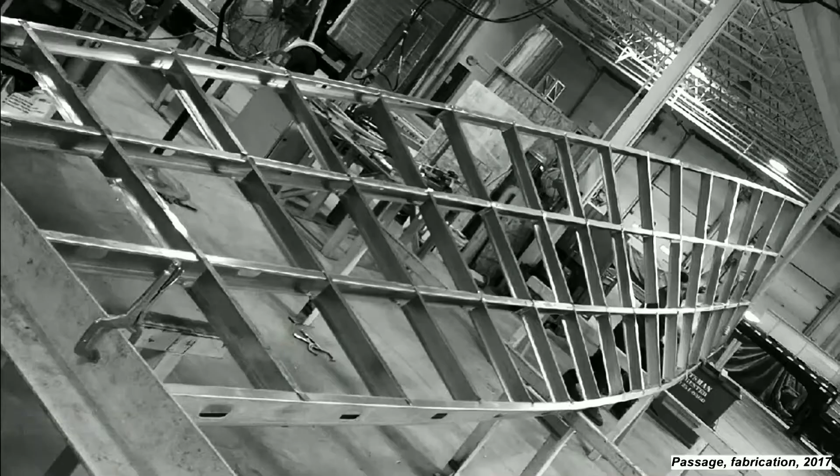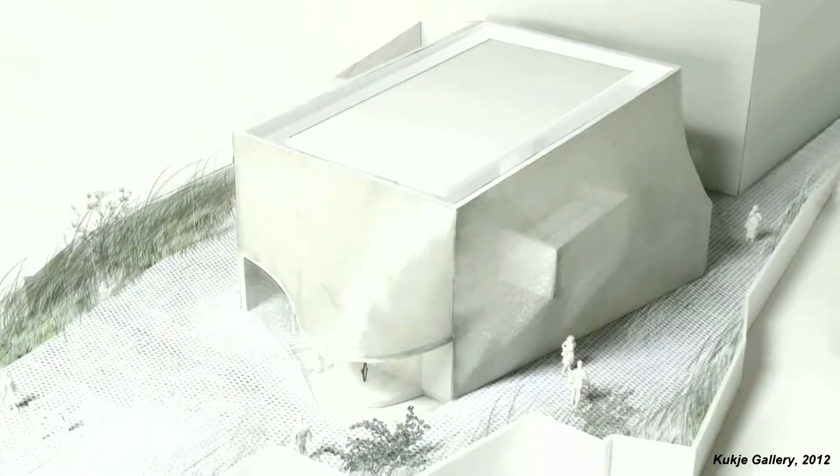So where we started with maybe a more traditional idea of building a practice around an artistic idea that then turns into a model—maybe a computer model, a mock-up—suddenly you have to go on Alibaba to the other side of the world and weld together 500,000 rings in a little courtyard in a place six hours' drive from Beijing in order to produce this.

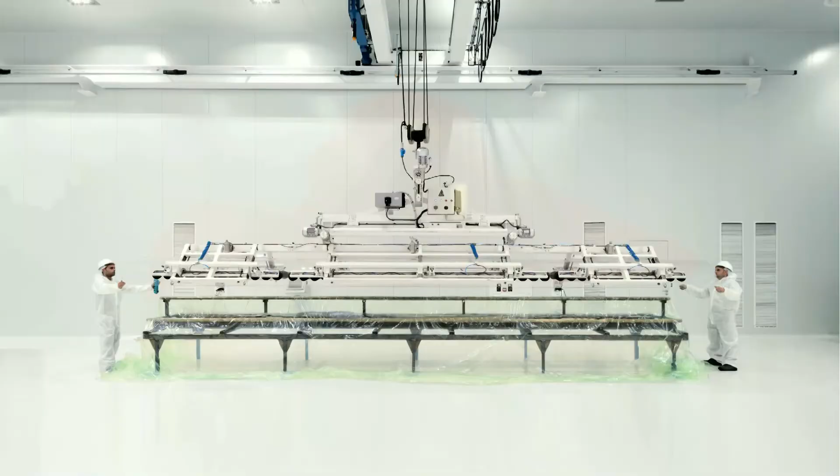Or when you're fascinated by an image of fragmentation and diffusion, you build a model, and then you end up in Germany in a very large factory where a fully robotic plant builds these large 30-foot tubes that then get installed on the top of a building in Hong Kong.

So what I want to talk about today is not so much the idea of a single narrative—not the single line that is authored and controlled—but everything that comes and everything that is attached to the conception of a project at the moment you embrace reality. I'll show four projects in detail, and try to show how the process itself is, maybe, the author of the work.

They're all four recent projects, and the first one is maybe the most complex, and also the first time for us operating at a scale we hadn't operated at before—a master plan. A master plan we're working on, though it's not really a master plan, because we don't believe in masters and we don't believe in plans. So it's more a strategy, something that will last maybe 20, 30, if not 40 years.

And it is at the Niagara Falls, in upstate New York. The concept of time and the concept of how to embrace these long processes is one of the things that really affects the thinking of this project.

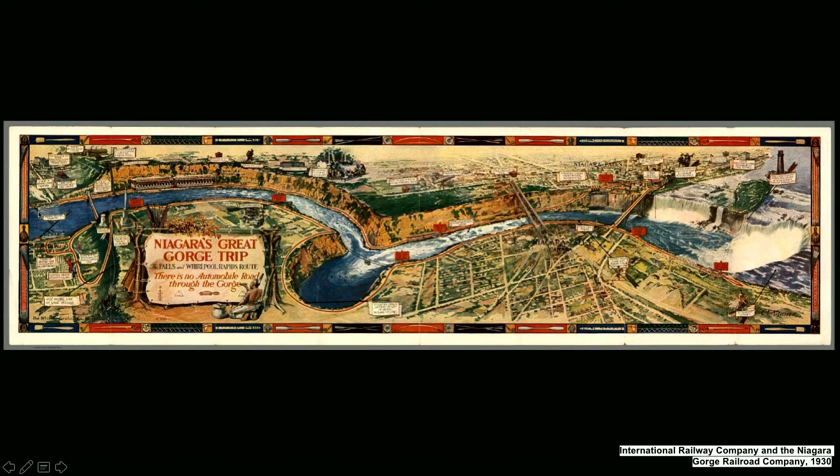And so if we go all the way to the left here, you see a site, and this is the site where this project resides, which is Artpark, and I'll get to that in a bit, for which we are currently working on a longer-term strategy. But if you go into the past and start digging how that place became what it is now, you realize an incredible amount of complexity.

I think it's important to see that the Niagara Falls used to be here, and gradually, over tens of thousands of years, it has been eroding backward upstream. This is at the edge of this slope, this is the site we're talking about. Also, there used to be here an Indian village, as it was described in the 30s, and we'll get to that in a bit.

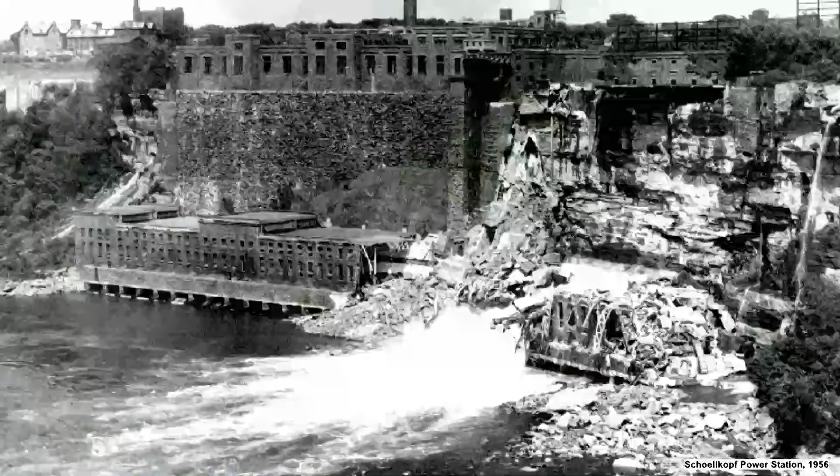What is also really important is that the entire economy of New York State is predicated on the hydropower that comes from the Niagara Gorge. And so the more recent history of our site starts when, in 1956, one of the main power stations collapsed.

The US was coming out of the war. Suburbia needed to be funded and goods needed to be produced. The upper Western New York region was a powerhouse of industry. As soon as this collapsed, basically there was no power anymore, and industry started to move. Nelson Rockefeller was at that moment the governor.

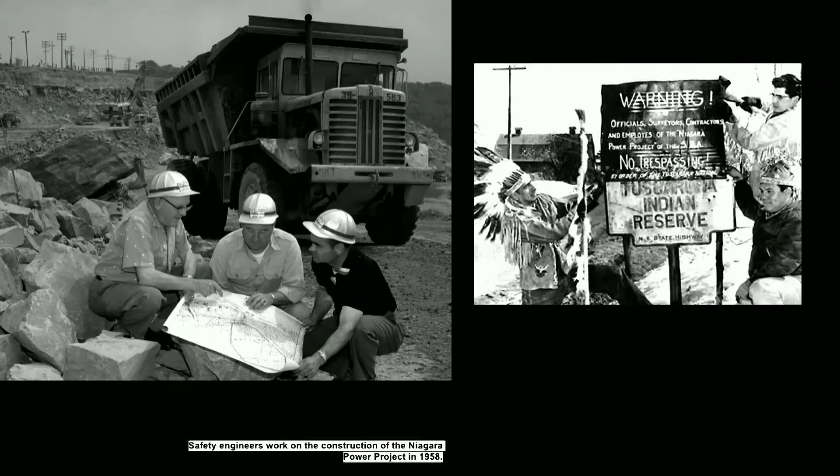But in order to do that, they had to remove two settlements of First Nations, the Tuscarora Nation and another nation. Their land was actually the land you see behind here. They fought it, they brought it to the Supreme Court, because obviously the First Nation settlers had been living in this area for the longest time. And here you see the Tuscarora Nation.

They went to the Supreme Court. The Supreme Court did say ultimately that the power of New York State is more important than the right to the land that these populations had had for many, many years. And so as they were digging, and this is post-war, there was a lot of earth movement happening. Here you see the lake, and here you see our site at the end of that gorge.

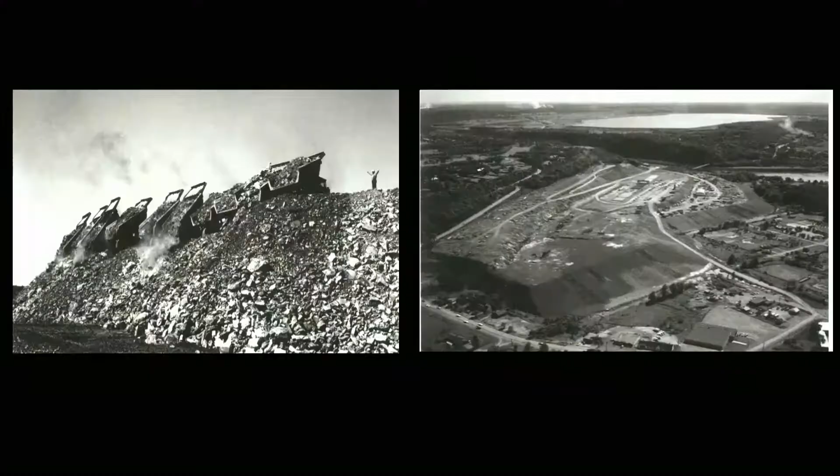Also in that time during the war, the Manhattan Project had happened up there, and there was a uranium backfill. And since there was so much earth movement, and almost like waste management of this whole area, that's actually what gave shape to this hill, which turned into Artpark. Here you see the lake, here you see the landfill where it was dumped in a town called Lewiston, with the truck path.

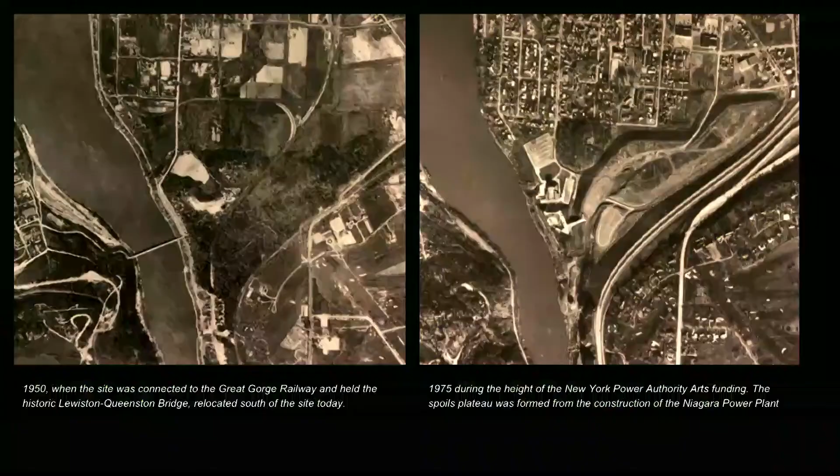They also encountered a mound from the Hopewell Nation. They avoided backfilling the land there. But here you see the aerial picture from before the fill and the backfill of the land, and the mound, the burial mound from the Hopewell Nation.

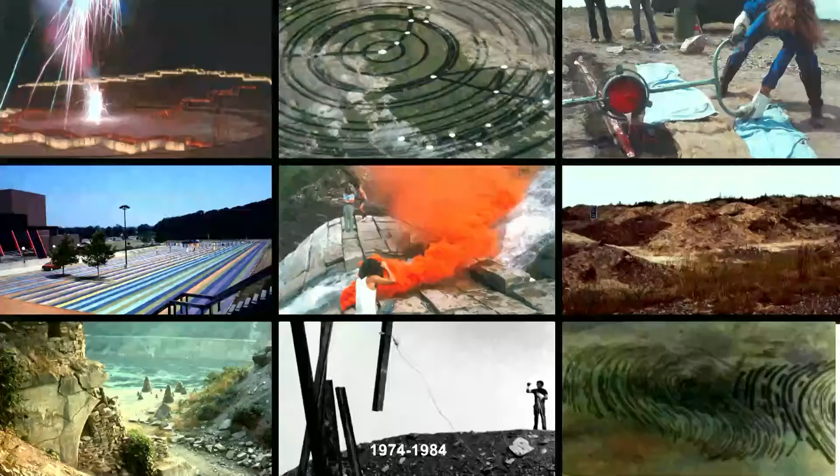Rockefeller thought, and this is a little bit later, but it was the emergence of land art, and artists were invited to use this backfill of this excavation to experiment. Not every artist in New York City was able to go west and dig craters or drive motorcycles, so many of the artists had to move upstate New York.

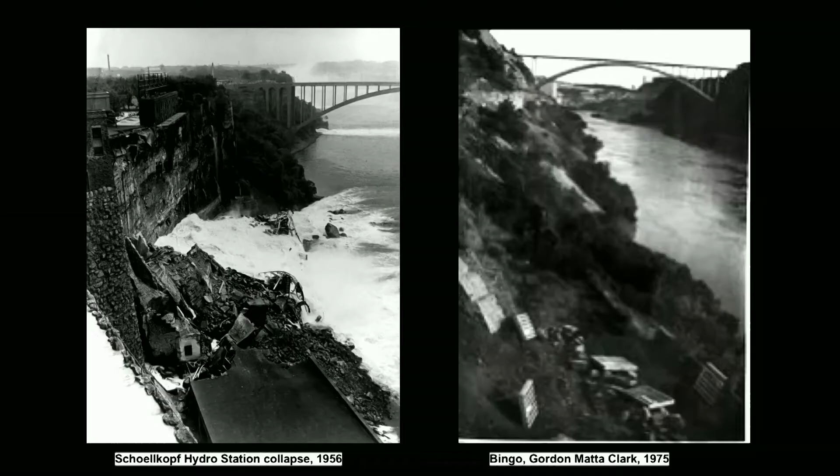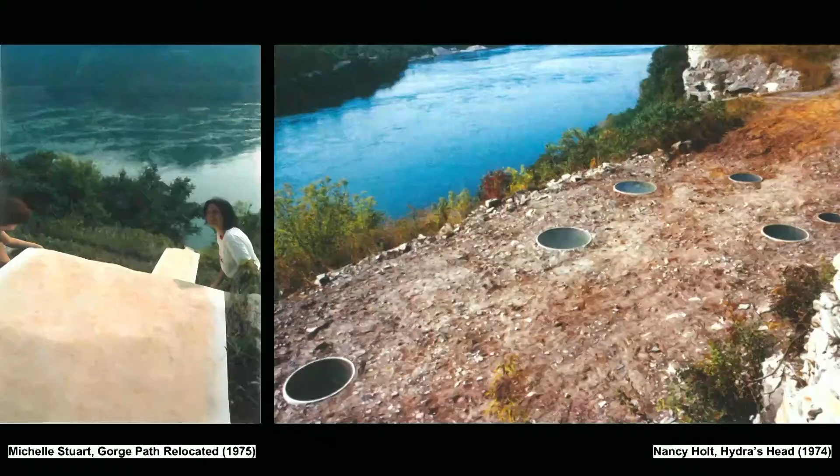This is really considered one of the main birthplaces of the land art and environmental art movement. For instance, Matta Clark reenacted the collapse of the station in a performance piece at the edge of the slope. The embrace of this depth, the topography and the soil, and the history that is buried within that land was an inspiration.

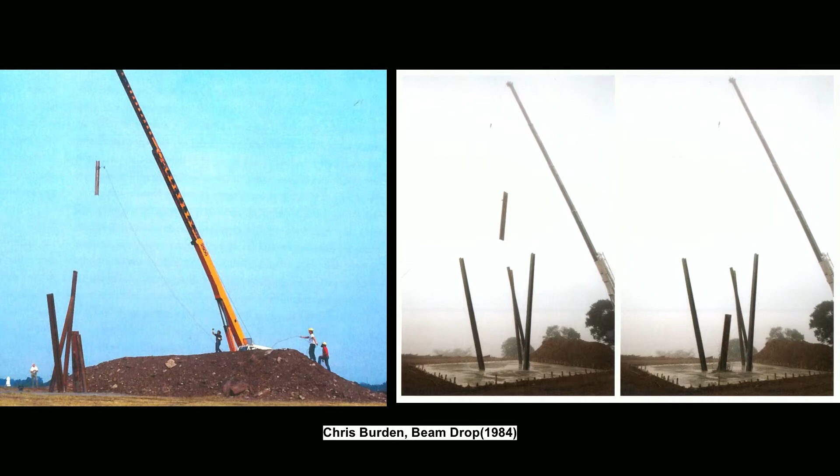Nancy Holt, Robert Smithson's partner, made beautiful cylinders that go into the ground, and from a more architectural point of view, Ant Farm dug a time capsule here in this soil. And maybe the most aggressive and macho, Chris Burden's beam drop, where he dug a hole, filled it with concrete, and with a big crane dropped these beams in.

So this idea of engagement with the earth and the soil, which all started with that backfill, began at that moment in history. Over time it became more popular, and there was funding. A local politician liked opera, so he built a theater for 2,500 people, although there were only 500 people living in the village.

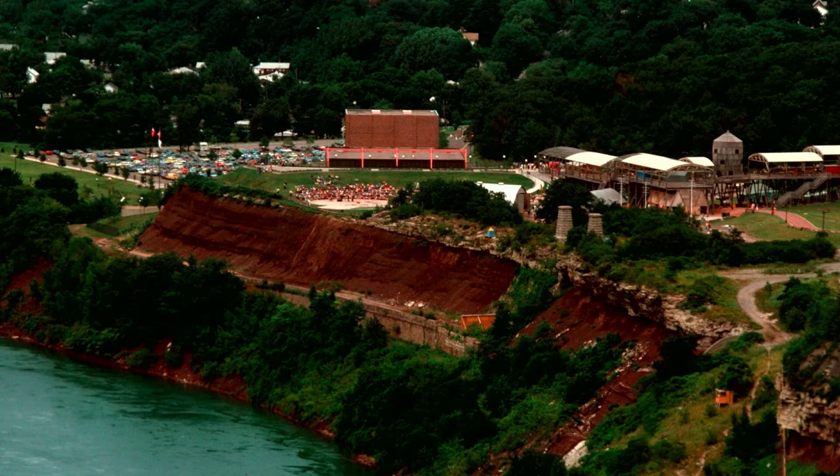There was participatory art, and in 1985 it was a really famous, great draw within the region. You see here the topography and the land. Gradually, when Rockefeller lost his power, the funding dried up, and the whole area, although still very much a park, is pretty much abandoned at this moment.

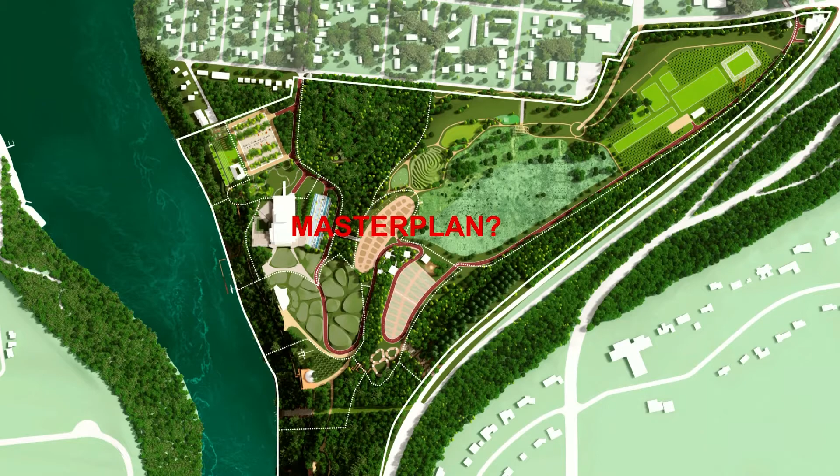So we were asked, through an interview and a competition, together with West 8, a landscape designer, and Charcoal Blue, a theater designer, to figure out what to do with this site. How, in a way, can we rethink this? With all this history, how would we address making a plan?

Indeed, there is no tabula rasa, there is no empty land, there is so much embedded within it. The site is very beautiful, the views are very beautiful, there is an intimate aspect of the gorge where you can get very close to the water, and at higher plateaus at some point you can see Canada, but it is quite empty and quite desolate.

The only thing that remained for the art was 12 classic rock concerts that happen annually, and that's also their only source of income. So the question was, how do you bring back a larger program, a larger audience, and also really make the site part of the experience again?

We started to visit the concerts. We saw Sammy Hagar and Jason Bonham, the son of John Bonham. We went to listen to all the old-timers, and in some way, the director said it very simply: our audience is dying, our acts are dying, what should we do?

But apart from just listening to the people who had occupied or claimed or taken over this land in the last 20 years, we also walked the site with representatives of the various First Nations. Interestingly enough, from their perspective, the best thing to do was to do nothing, to not touch the land, to not start moving earth or digging and transforming this place again, but to just let it rest.

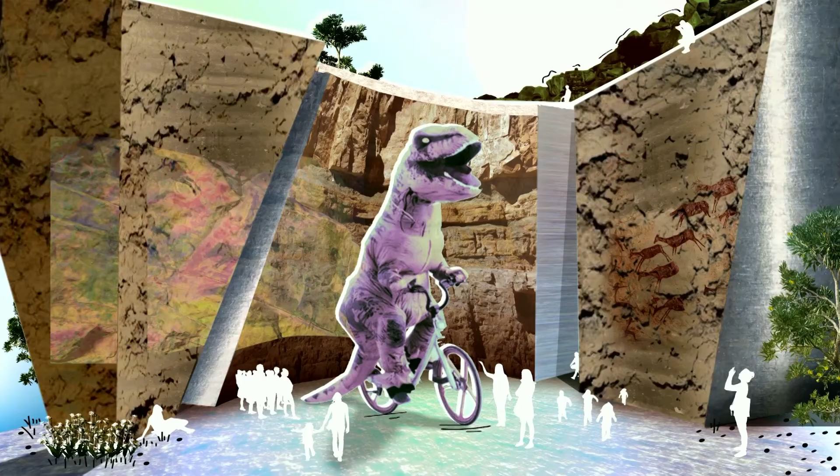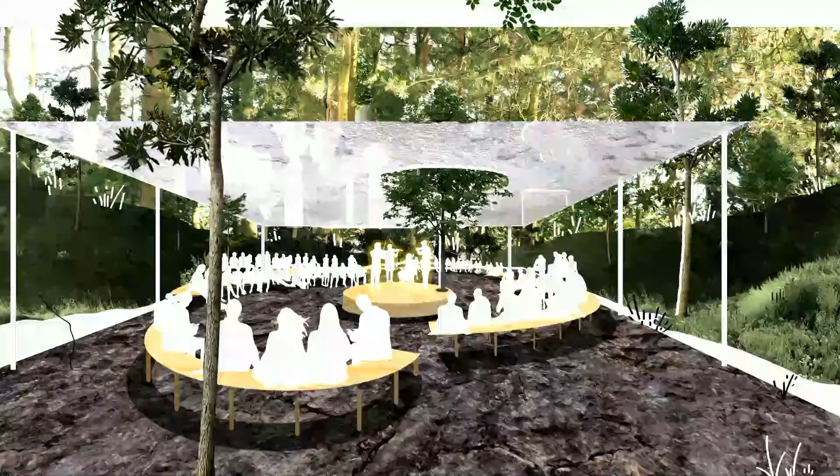So we felt we could not come up with a master plan that would radically add another layer to this. Instead we thought, is there a way to make this complex, layered history, these different sediments of time, tangible for an audience? Is there a way to deal with this idea of the section, to take people through these layers into the soil, if you want, to frame nature? These are a number of vignettes, and I should say maybe you saw an image of a big book we made.

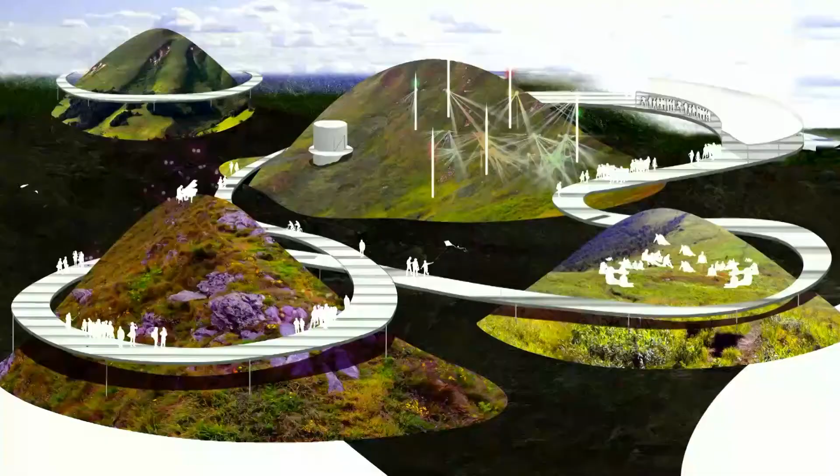But this is not a master plan, but it's really a series of interventions, a strategy of things that could be done in order to heighten an awareness with the audience of what is that layered and complex history that has taken place here, and also this embrace, in a way, of the artificiality of the land.

This is not beautiful nature. This is not a romantic landscape. It's not a park to escape from context. But in some way, it is representative of man acting on Earth.

It's owned by the power authority, which remained the responsible party for this land. And there is a real drive towards working to a more sustainable approach, bringing hydro, solar, and other types of power in there. So this idea of something a little more future forward is also something we wanted to introduce through this imagery and these vignettes that were guiding principles for a series of interventions.

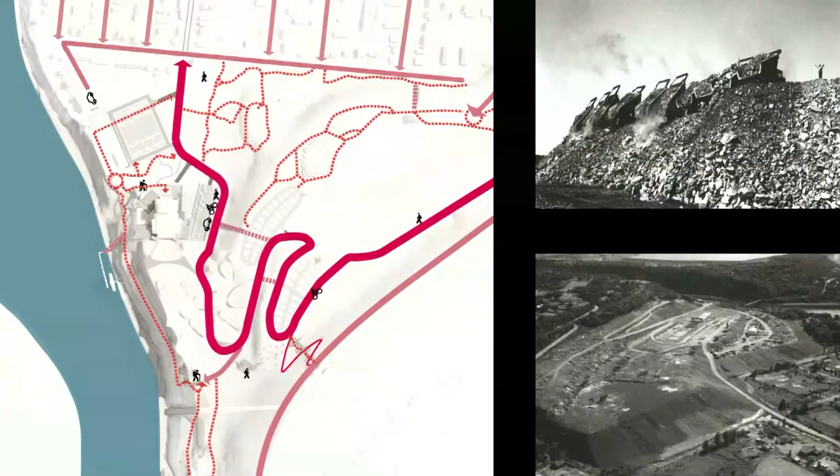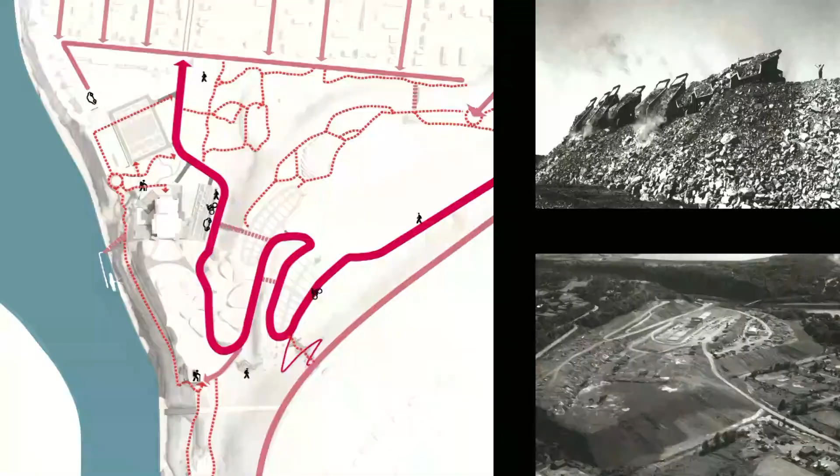I will not show all the interventions, and I will not show too much of the process, but I wanted to highlight one project that is now moving forward, which in some way tries to illustrate how we are trying to bring back the legacy of this land, the history of this land, and also bring it forward with a new proposition.

One thing is that we use the truck route as an organizing path on the site itself, so that as you move through the site, you're actually following the truck route that the trucks used to get down the gorge dumping soil.

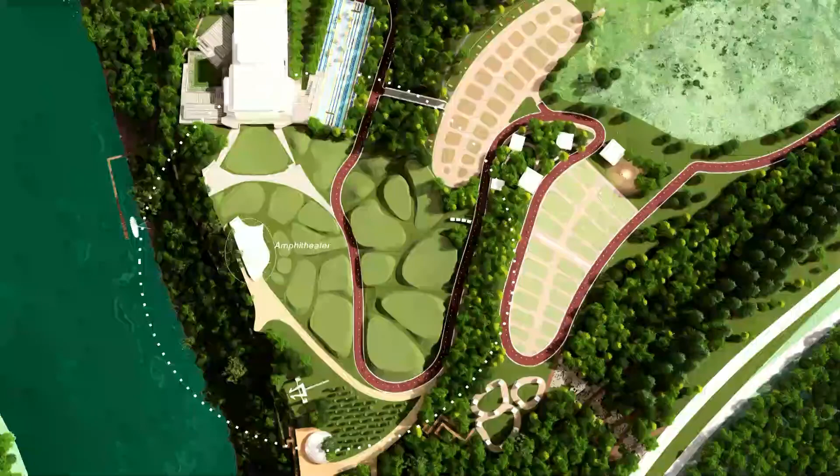And this truck route wraps through the new amphitheater, which is the one thing we're going to construct first. It's a 10,000 person amphitheater, basically a betterment and an improvement of the current setup. This is their main revenue stream, and this will also be the thing that will help them expand and grow afterwards.

And this artificiality—since we cannot dig, and since we don't want to dig—we started to think, how can we create this amphitheater as a series of artificial hills that are also really attractive when nothing is happening there, when there's no concert, but also throughout the year, to attract different types of audiences who are not just coming for the concert. So this idea of artificial knolls that can suddenly be occupied if something happens.

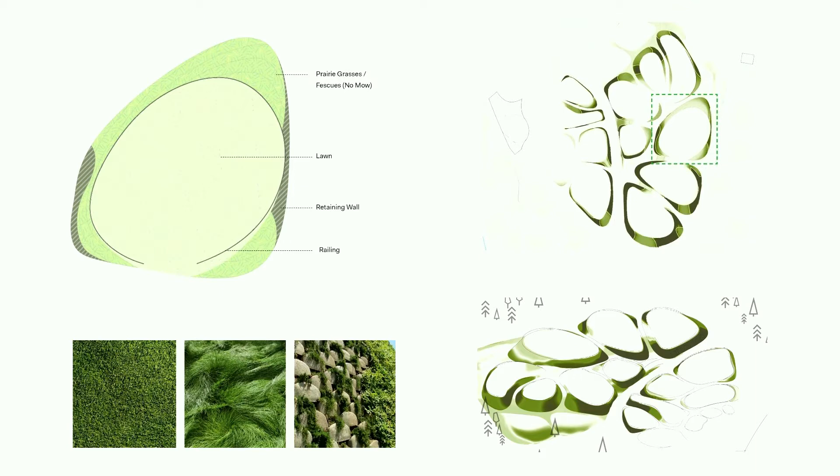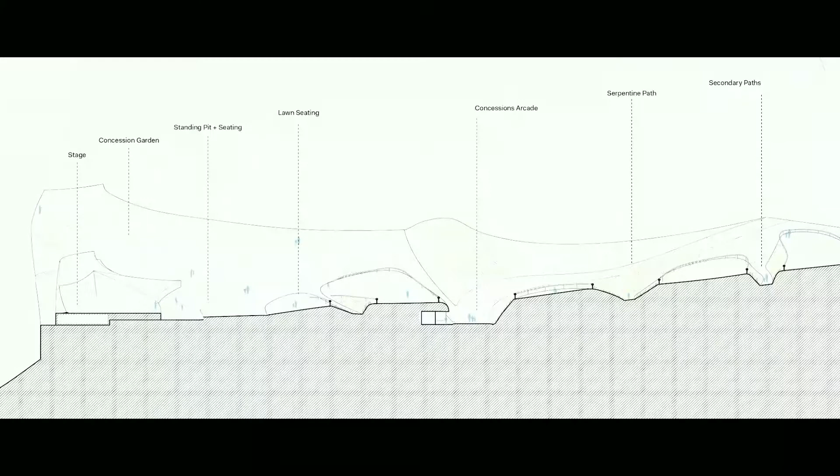Together with West 8, we developed a strategy of making these knolls that we can really shape into this bowl that then becomes the theater itself. The seating is basically a natural vineyard seating, with all different capacities, accessibility, egress, and what have you, shaping it along the hill, looking towards the bandshell at the edge of the gorge.

So most of the year, when nothing is going on, it is this landscape that people can walk through and walk in between. And then sometimes when the events happen, it will be occupied.

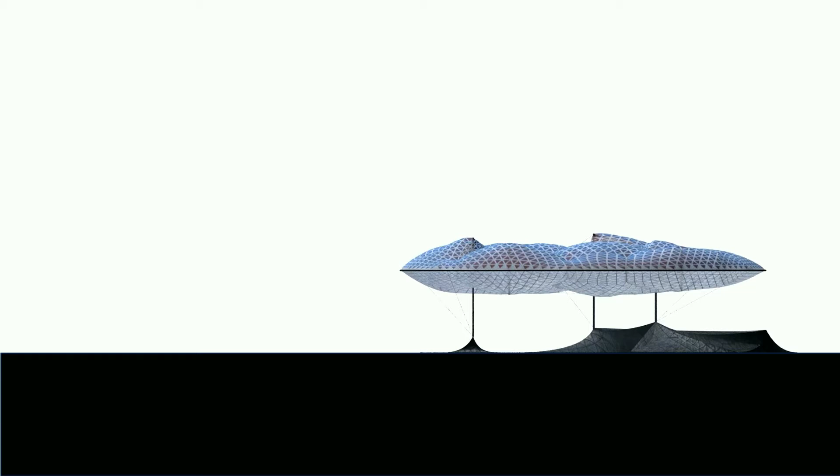Turned into this venue. And then the band shell itself plays with a structure with an inflatable cover, one that generates energy. Basically, when there's nothing going on, it's just a structure standing on the edge of the gorge, and only when there are events does it become this canopy and cover the site.

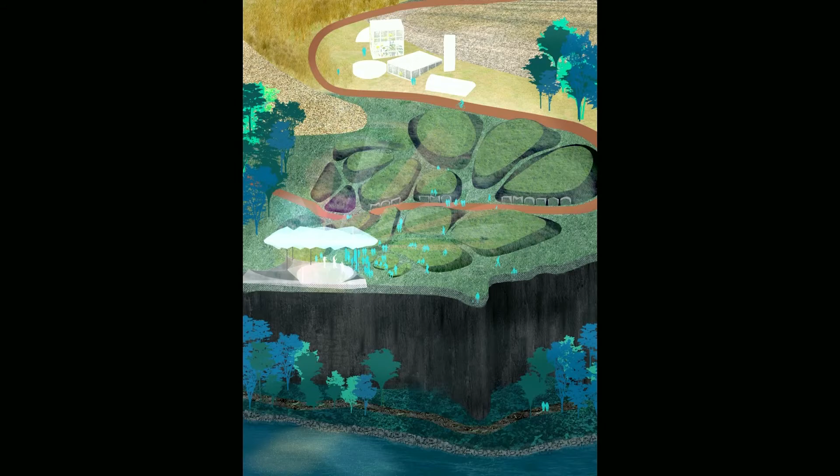So this is ongoing. We actually recently got a first approval to move forward with a first intervention. And to celebrate that, we recycled a pavilion we recently built for the High Museum on the site where the future band shell will be.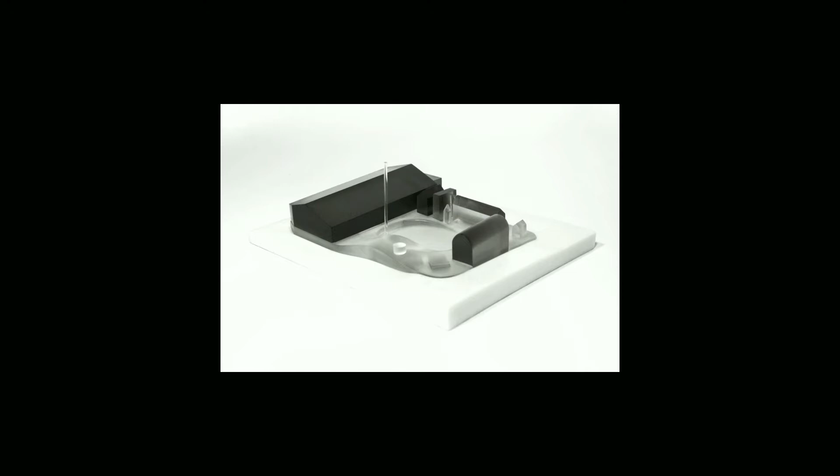From New York, we moved to France, to northern France, to the Alsace, Vosges—a different gorge, a different series of mountains and rivers.

Which is the birthplace, or at least one of the very important regions, where in Europe glass and glassmaking came from. It was there because there is water, there are minerals in the soil, there is a lot of wood for fire, and then air—the last element that humans could bring in order to make glass.

Glass used to be made by families that moved from site to site in a nomadic setting, wherever the soil and the wood was available. This is like the 1400s, 1500s, they moved through these areas and through these mountains.

Only in the 1600s and 1700s did they start to settle in this place on the right, which is our site, Meisenthal. Meisenthal was founded by a family, the Walters, three brothers basically, who settled in this town, and over the course from 1703, generation through generation, family through family, grew this place into one of the main producers of glass.

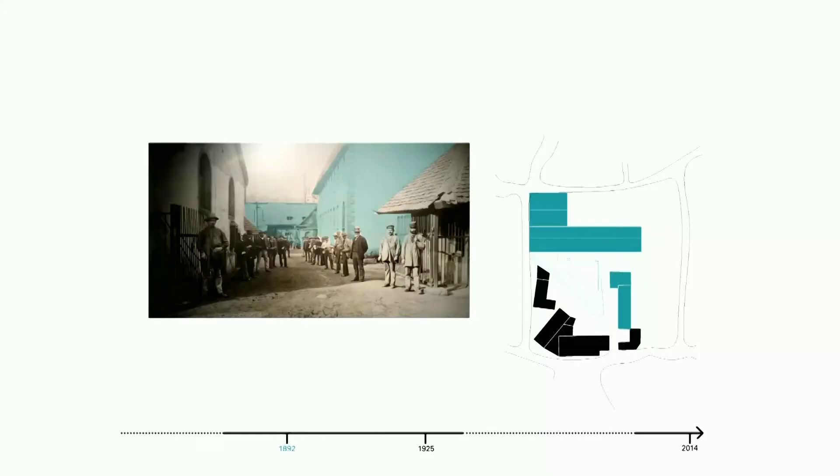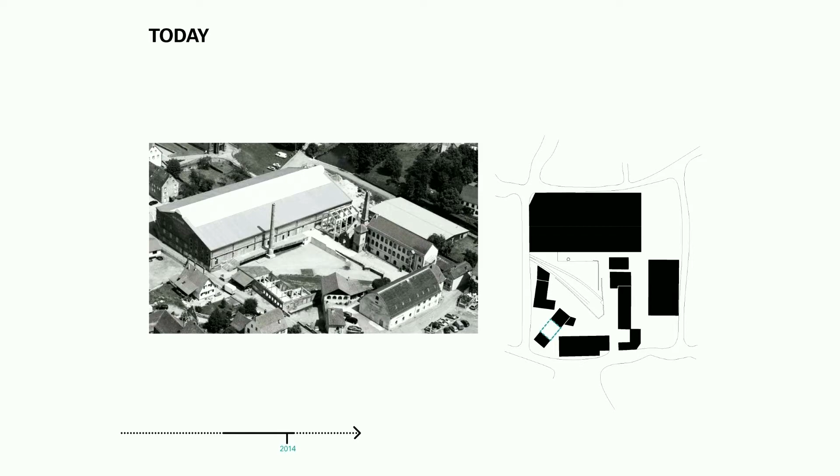Transformation, manipulation, erasure, demolition, up until the day that we were invited to think about it and help transform this place and bring back, in a way, the history and legacy of this glass, for an international glass center. It was a public competition, and we happened to win with our proposal.

Here you see it right at the time of the competition, the factory at the center of the town, really the town square if you want. There's a total of 230 people living in the town, but this factory is really the core, because that's the genesis of this place.

So the question was how to bring back and make this an attractive destination. There were at that time 3 independent organizations using the site. The large factory hall was used seasonally for concerts, very much like Artpark. In the middle, you see some structure with an orange roof - that's where the glass studio, the artistic glass studios, were. And then there's this old building that had the history of this company, Meisenthal, as its small collection of artifacts showing the history of this place.

The brief was how do we bring these 3 separate organizations together into a much more strong, central and organized site. We thought of these 4 elements and the idea of how to bring the fluidity, almost of the ground, and use this idea of the molten earth as a way to generate maybe a new landscape.

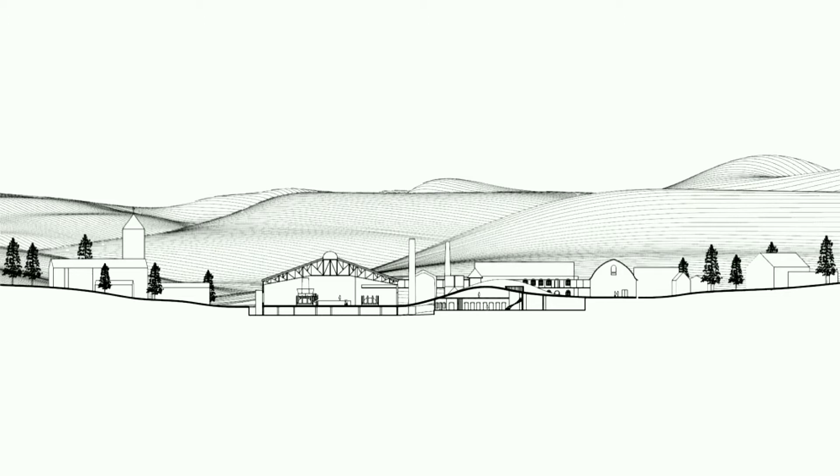The idea that we could bring together all these different organizations into this singular land. The idea that the ground itself would in some way form a tapestry, if you want, that would organize these three separate organizations on a new common ground.

It would allow us also to unify all the entrances, because they were at different levels on the hill, and really create a more common area in the middle, which used to be the factory yard, and now would be a common public space in the middle.

And by lifting the ground - there was an old ruin here - we could introduce a cafe, entrance pavilion, education pavilion, and visitor amenities.

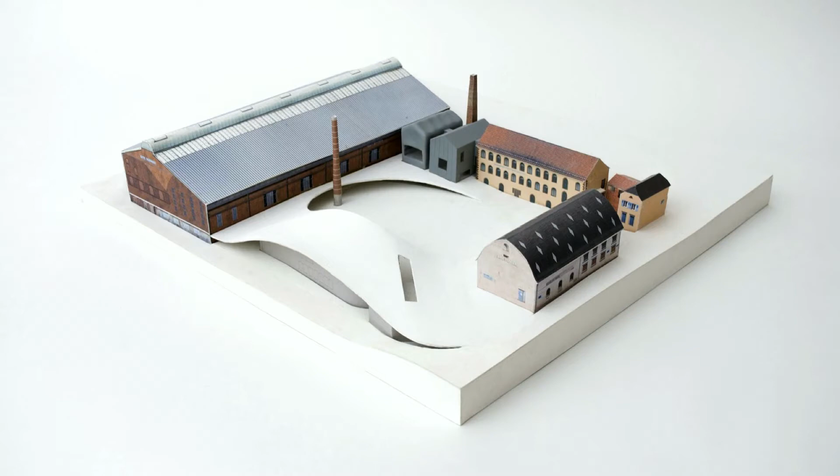So now the three separate organizations are unified within this one space. Although they are still separately legible on this new landscape, underground they are all connected, and there was a lot of infrastructural upgrades that needed to happen.

We introduced a black box theater here for concerts that could open to the large hall. It needs dressing rooms, organization, entrance over there. Similarly, the museum has its new entrance under this ground, and also the glassmaking studio in here, the old ruin that we transformed into this visitor center.

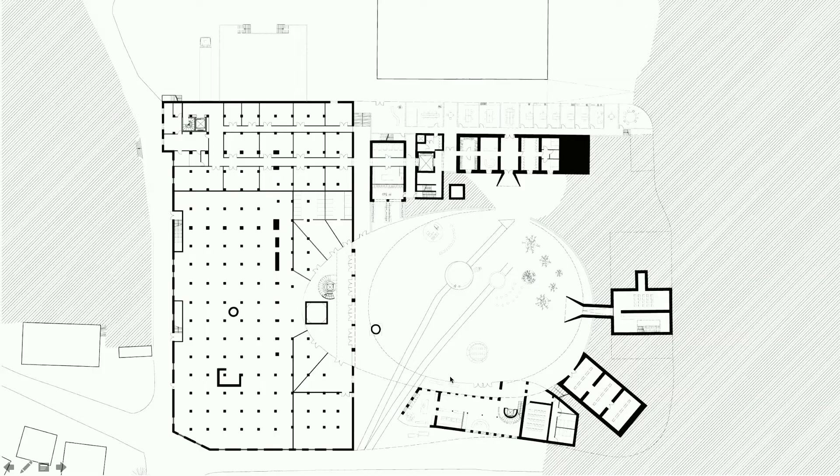And so here again, we're working not on an empty site. We're working on a site with centuries of history. Adding to this, in some way, it's not that you're making a new project - it's really that you're adding on layers and layers of human intervention.

We use the same act, in a way, of adding, subtracting, editing, building up, building under, continuing and discontinuing, so to say. So when you find the site now, when you arrive driving through the hills, suddenly it appears, and it's not completely clear what is old and what is new, and how our layer, which is a single layer in a longer history, adds to this

constellation of spaces.

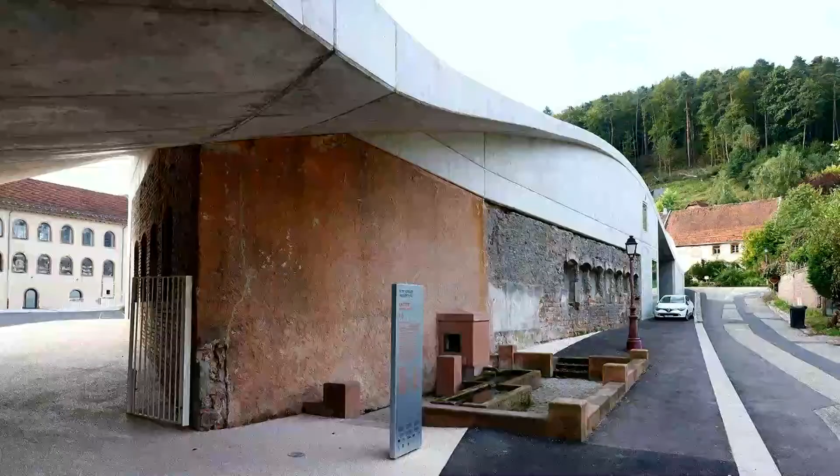Here, for instance, the landscape covers the old ruins, which now is actually transformed into the visitor center and the ticketing and education center. You enter under the landscape into this common courtyard. So the land lifts up, and you see the old factory, the old train track is still here, and this is the old glass-blowing studio.

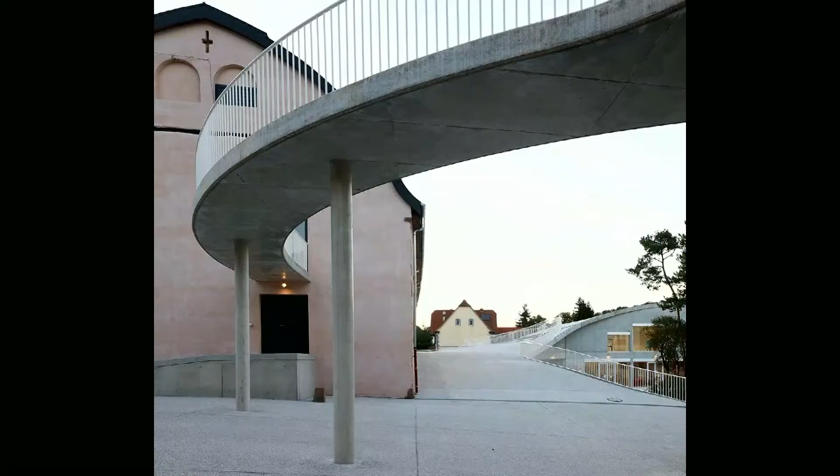We reused two old structures and reclad them to make new glass workshops there. Here's the visitor center with the education center. So you can walk in, under, over, and around this landscape, unifying these three organizations into a single landscape. At some point, on higher levels, it connects from the museum straight to the glassmaking facility, and then ramps down again. Here you see the old museum, which we restored, with a beautiful roof, but the entrance goes under the landscape.

The black box theater is very flexible. It can be a closed space for 200 people, but then the backstage, actually a big door, opens up to the entire hall. So sometimes they reverse the stage, and the acts perform towards the back, and there can be 5,000 people in a standing concert.

So again, this idea of not just operating in the middle of an empty site, not starting from scratch, but really thinking about how to continue certain lines, if you want, of history.

This is some recent shots. What is it? I think October. Last week.

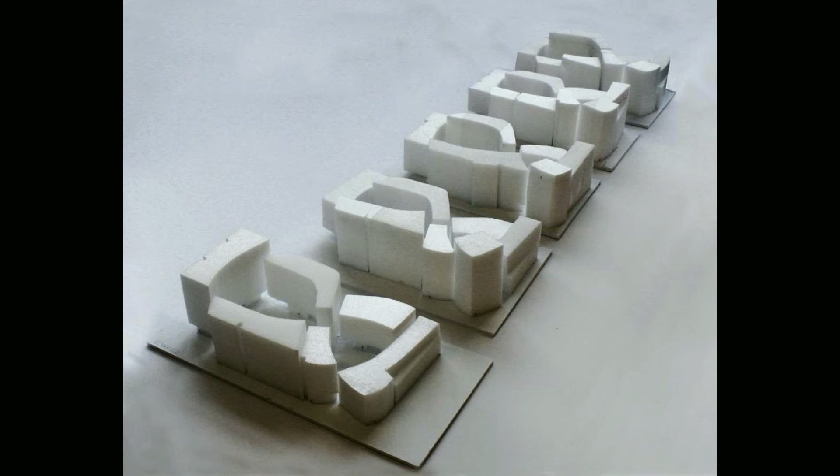The challenge was to make a porous, open building on a very tight budget — 60 units for $2.5 million — but one that also has character, a personality that people would be excited about living in. Through a series of workshops with the housing authority and possible future residents, since they would become the owners of this house, we worked through and came up with this scheme.

The scheme is in a way a lemniscate form, where you enter through a smaller courtyard, and there's a large courtyard, organized around the center. There's basically a circulation loop that allows you to find different ways to your home. It's all single-loaded, meaning although the apartments are small — 500 and 700 square feet, roughly 50 and 70 square meters, 2-bedroom or 3-bedroom — they have cross ventilation through the courtyard and natural light from both sides.

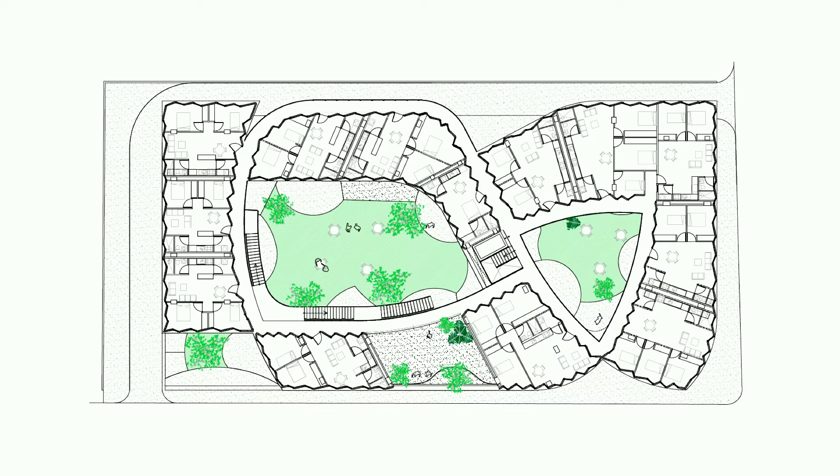There's an additional stair that wraps up to the top of the building, and we omitted a few units to use as common spaces for people to enjoy collectively. With that single-loaded corridor, the challenge is that people might be staring into your unit — a window to the courtyard or corridor is often what people find problematic. So we curved and rotated these panels to create much more oblique views, so people aren't staring straight into your home.

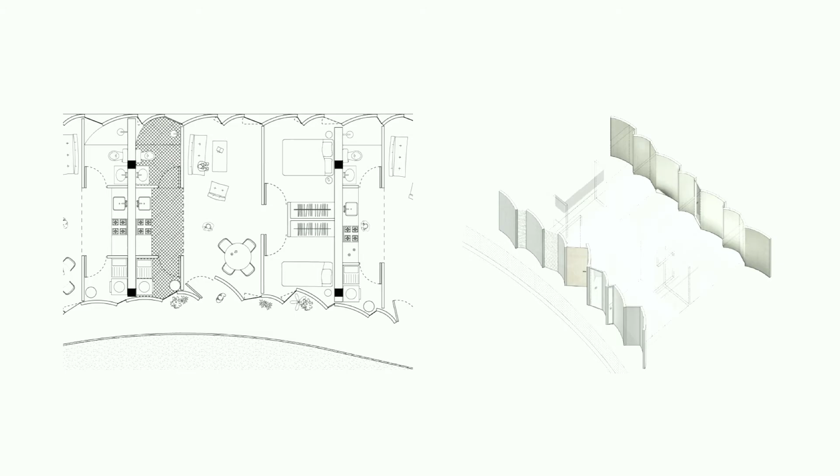We thought it needed to be very efficient and economically feasible, so we decided to precast the building, making everything out of precast panels. It can be built very quickly.

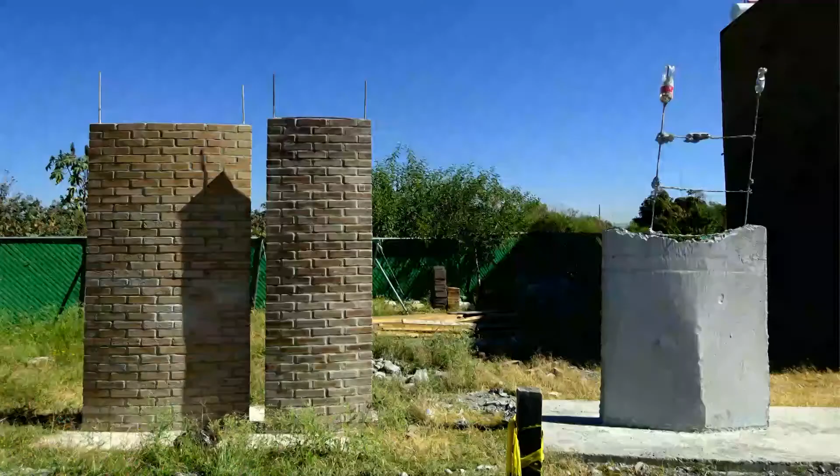We asked for a mock-up, but the team was very nervous about this idea of precast. They made a mock-up — on the left, they said, this is what we prefer; on the right, they said, this is our precast mock-up. We said, it doesn't really look like a precast mock-up. They said, yeah, we really didn't succeed. It was really hard.

Then after a while, they explained: in order to get one of these precast panels installed, we have to work with a company that's four hours away by drive — there's one guy who can make it. A truck needs to drive to the site, and a crane needs to lift the panel in place. To get one panel in place, we could have 30 people work for 30 days on the project instead.

And so then we said, well, wouldn't it be better to involve a larger community in making this building, rather than having this one guy who owns the truck, one guy who owns the crane, and one guy who owns the plant basically get all the money of this budget.

One worker in Mexico can carry a maximum of 17 kilos by law, so we could not make anything heavier than 17 kilos. So we thought, what if we built this wall out of block units that are exactly 17 kilos?

We worked and experimented, because it also needed to accommodate this sinuous form, and we needed to keep it simple. So we ended up with two blocks: a standard block, which can stretch as long as you want.

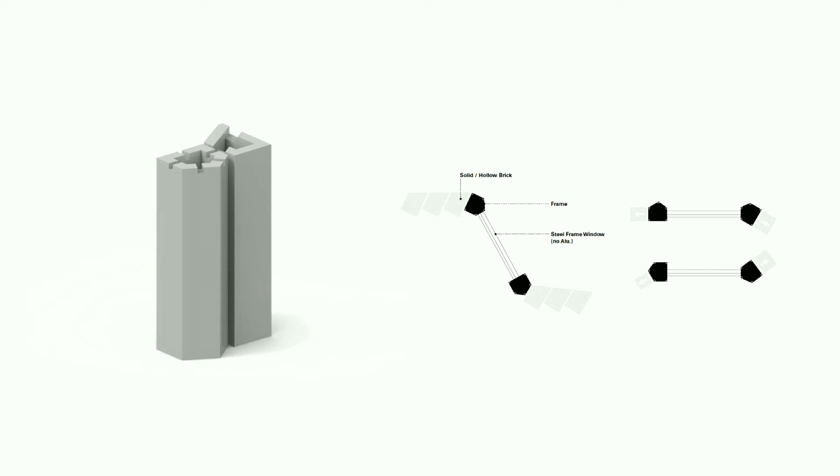And then a pentagonal block, with irregular angles, that acts as a hinge. Whenever it has to take a corner, it can hinge and lock in, because the windows, of which we had one type, need to always be at a 90 degree angle. So this hinge point allows it to accommodate the curve, whereas the standard gray block can extend as much as you want. It's exactly 5 of them stacked for the ceiling height we had, and 17 kilos each.

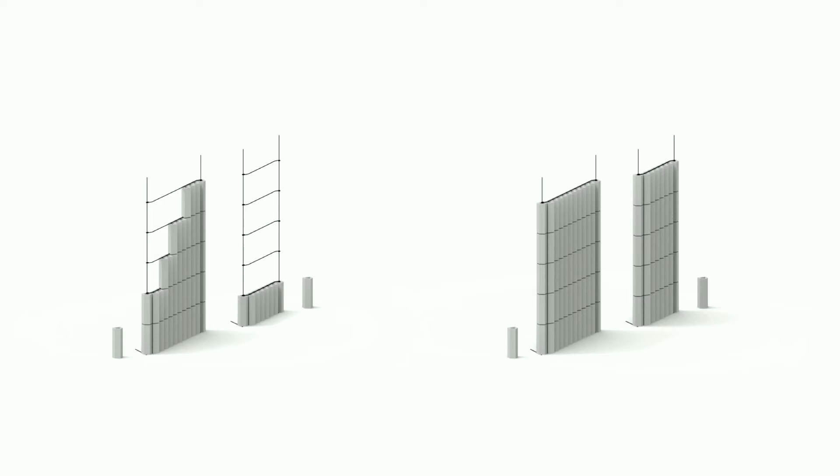So we made a mock-up, and that worked. We actually liked it much better. It had much more texture. In some way you really saw the hand in the final element, and it had a texture and touch that we did not think we could achieve with precast.

And so this is how it's built. It opened in April this year, and the families moved in, and so you see it here next to the park.

Here's one of these open spaces where people can see their kids playing. On Sunday there's a market that gets immediately fully occupied and embedded within the context. This is where they're setting up the market earlier in the morning.

And so you come in here through this door. The first is sort of the more intimate courtyard that you experience, and from there, in the public open ground floor, you get into the larger courtyard.

Here you see the stair that wraps up all the way, and some of these open areas up here where there is a vertical connection back into the smaller courtyard, which is taller, with a staircase that takes you up to one of the units. And so the entire facade is actually this one stone.

The climate is very attractive. You don't have to put in insulation, it's purely natural ventilation because of the altitude of where the town is, so it's all naturally ventilated.

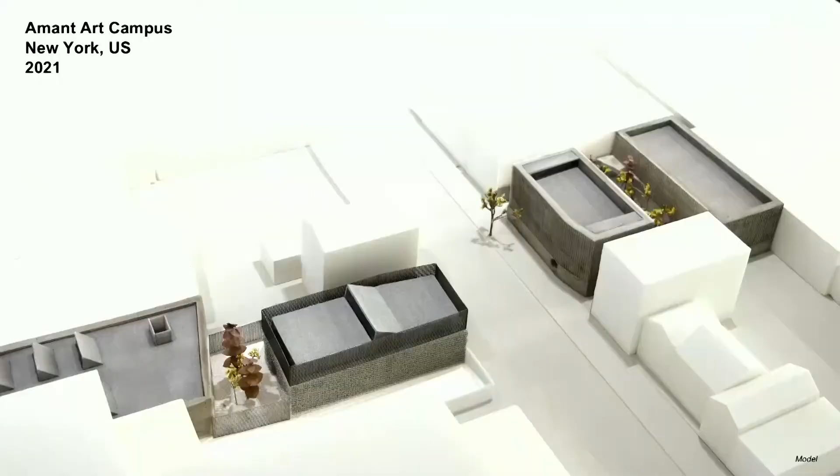I'm going to end with a last project, and I think some of the lessons around process, labor, and time are changing the way we're thinking about the way we make our work, and in some way, we'll see where it goes.

But I think this is a project that just opened, or is actually still in the process of opening—it opened over the last year in phases. And I think it shows an attention to materiality and labor, an interest that I think will continue to develop in our practice.

It's in Bushwick. Bushwick is sort of the anti-Manhattan, if you want—it's like the industrial area where a lot of art and mostly manufacturing spaces are, but obviously also now art studios and what have you.

Our client was interested in making a space that would support the artist. It's a private organization, and often with private initiatives in the arts world, they want to make a museum of their own collection. But this client, Lonti Ebers, said no—what can I do to support the artists? How can we make a space where the artists can feel at home, where they can work, have a resource, a space to produce, to think—just to support them so that New York still remains a place where artists can come and be.

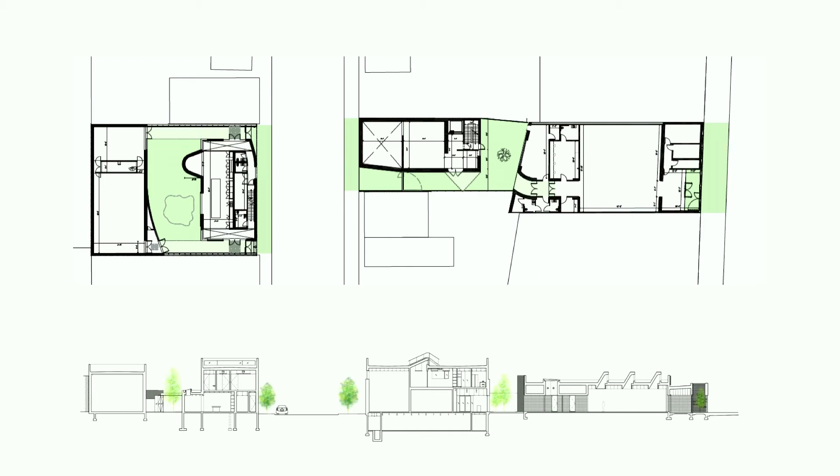The boxes themselves are, in some way, very neutral. We had to think about how to give those quite simple boxes a certain amount of detail, a certain amount of particularity - maybe introduce a certain history or element of time, as if they had been expanded or grown over time into that as well.

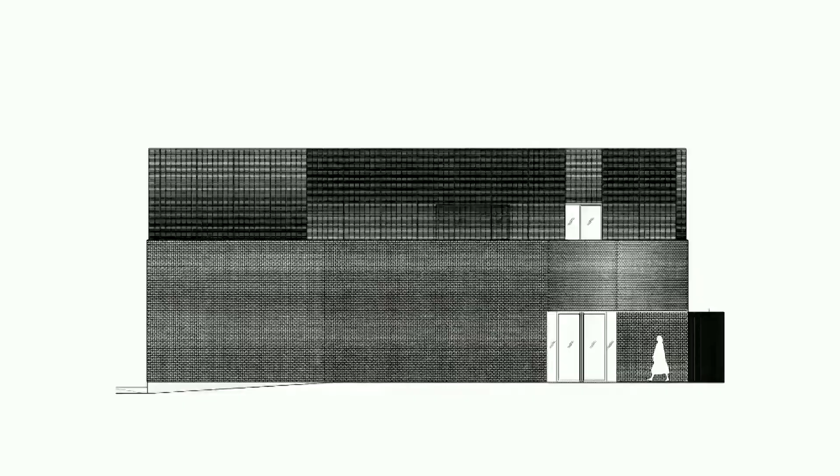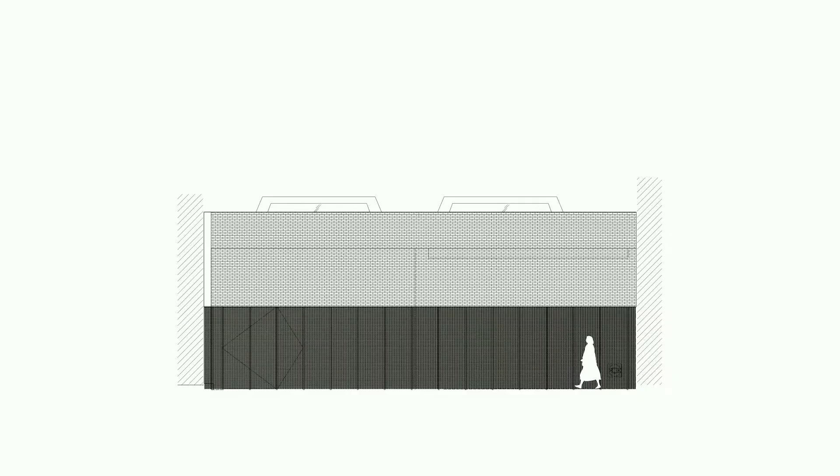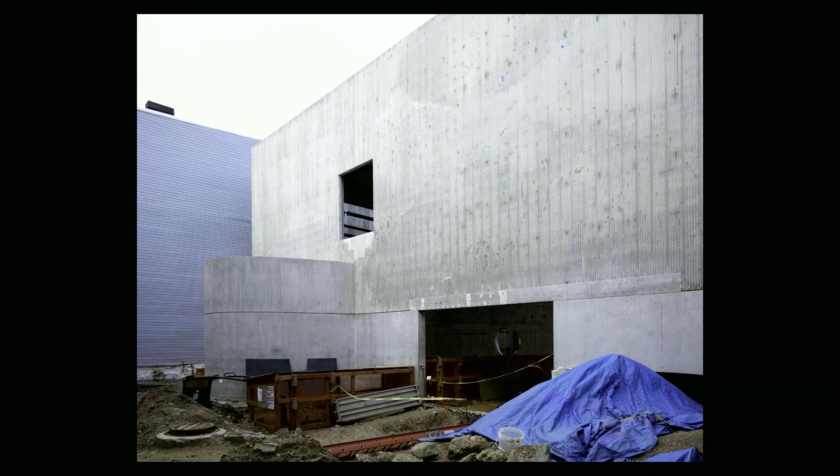The other thing we worked on was finding a way to add texture and materiality and differentiate between these layers with this horizontal datum. This is really the first time I'm showing this, and it's not a very polished story necessarily, but I want to show how we worked this detail and the craft into the project - corrugated texture at the top and a smooth texture at the bottom.

The introduction of particular moments and details - one window, actually the window you can see all the way through the block at the end of this alleyway. We tested many forms and then decided on this one. It became known as the potato window.

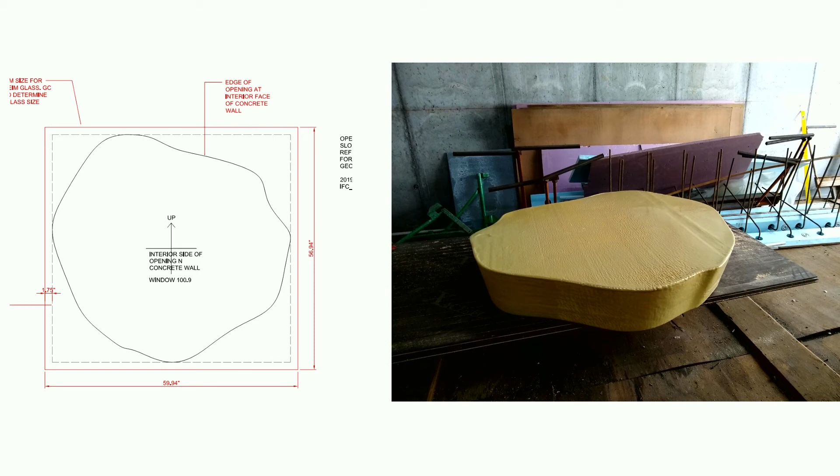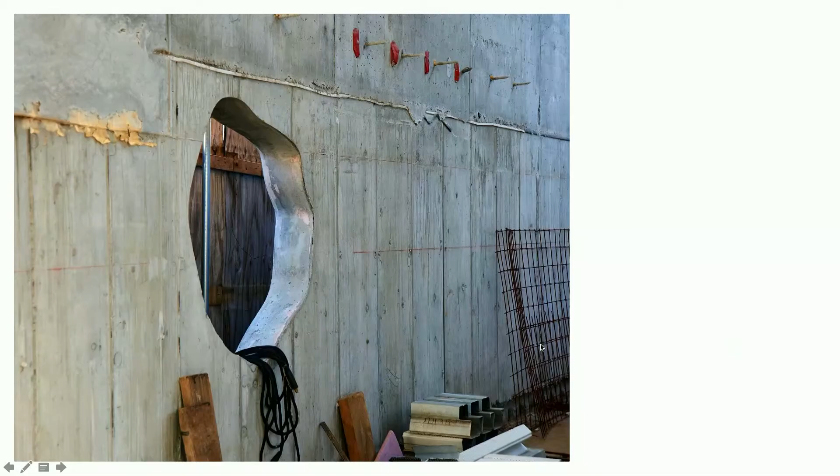There's the form - because how do you make a window this shape in concrete? We sort of shaped it. Here you see it introduced into the formwork, and as it comes out, the glass itself is larger than the opening, so the glass sits behind that form because we would not cut the glass in that shape. Here you see the shape after the form came out, and you'll see later how it turned out.

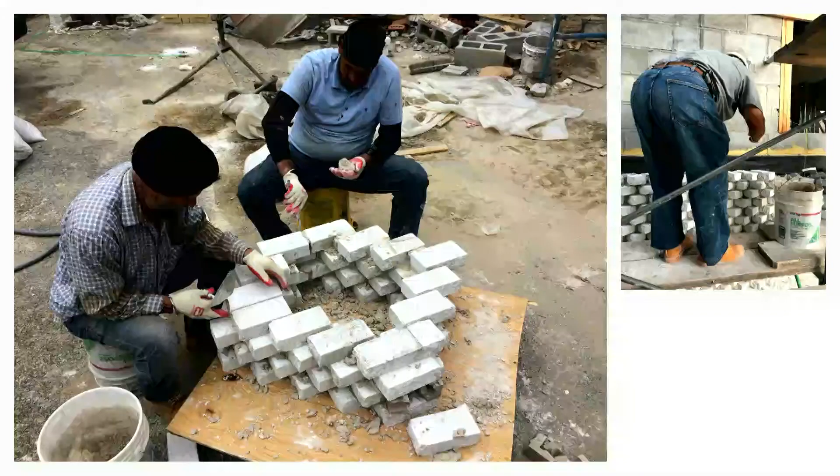The other building we worked on in a different way to introduce texture and particularity. I forgot to say, we used very contextual and simple materials - brick, steel, concrete - but we tried to see how we can manipulate them. This is an ordinary brick, and we started mocking up how we could produce a different texture.

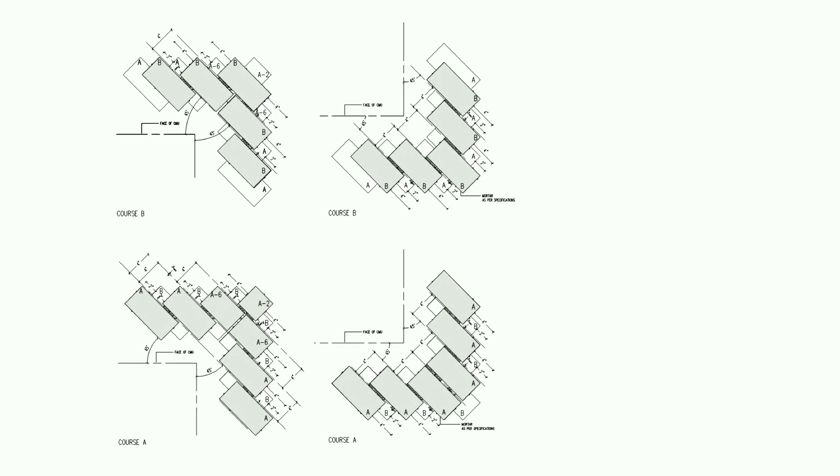It's actually a brick that is smooth on two sides and rough on two other sides, and so we organized the entire building in this way. Every face is actually unique - some has two rough sides, the other is half rough half smooth, and the back is fully smooth. Every brick was drawn and indicated. The corners were complicated to solve.

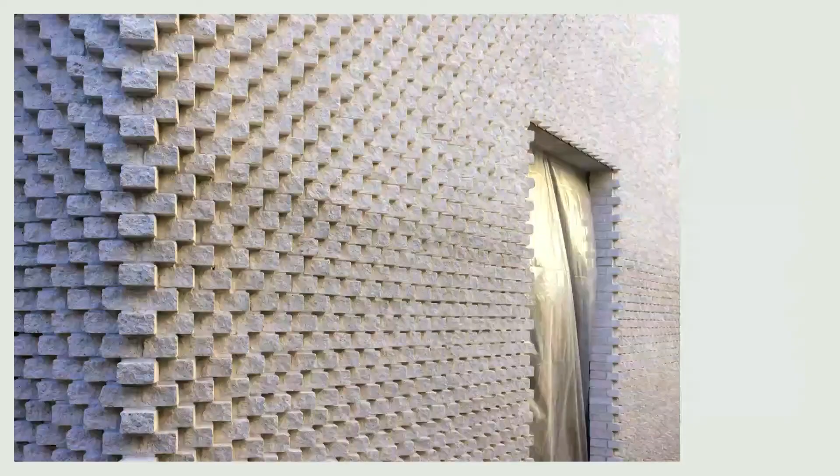How do you produce openings within it? So everything was mocked up through trial and error, and that's how we created this volume that is completely made out of this single rotated block.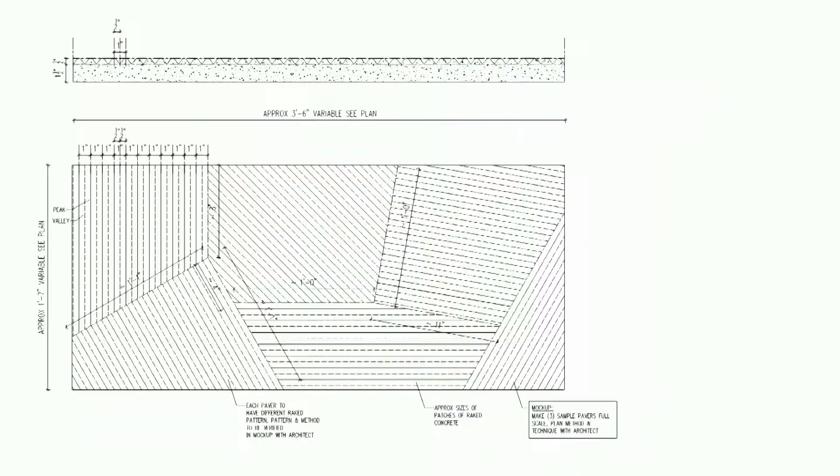And Unistrut as a fence that unifies the entire campus. We tried also on the ground to unify the entire ground of the campus through this patterning in the concrete.

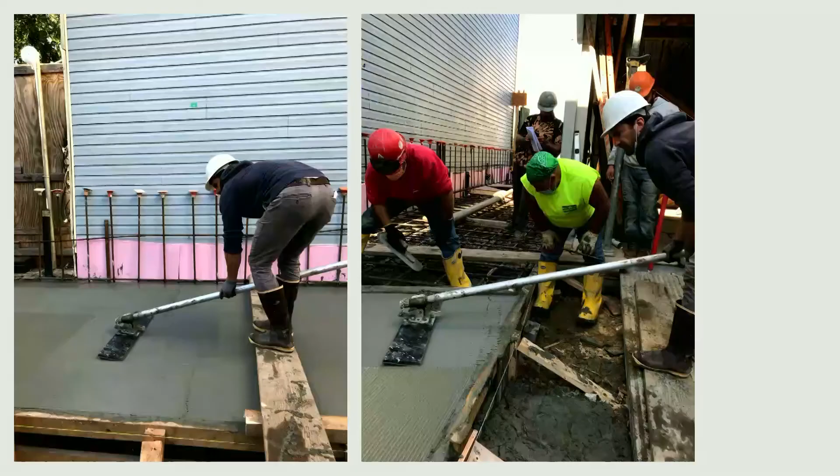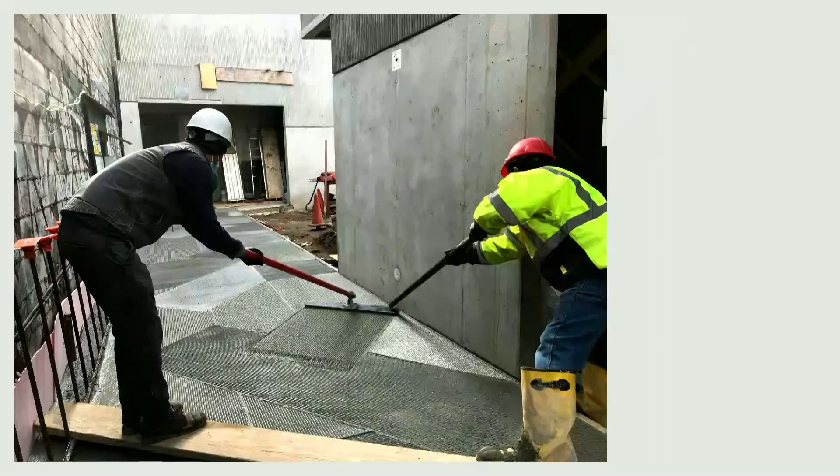So we made a custom rake and trained these guys how to introduce this somewhat random but still very much designed pattern of raked concrete. Here you see them drawing in the concrete, unifying the landscape throughout the different buildings and sites. And here you see how it ended up.

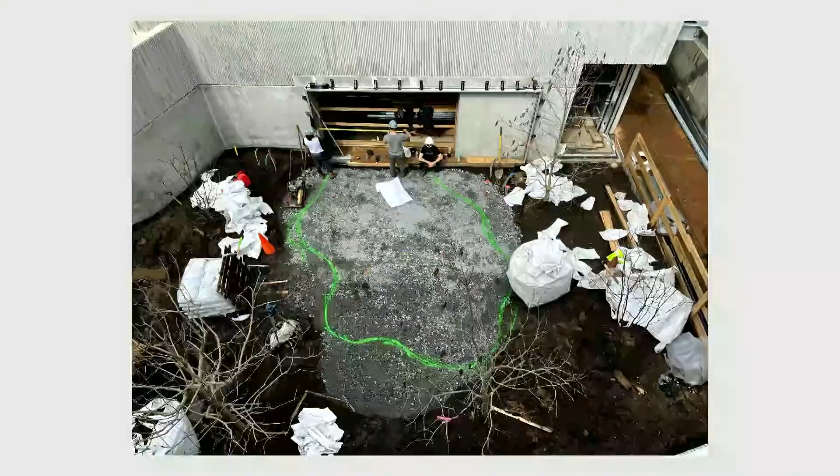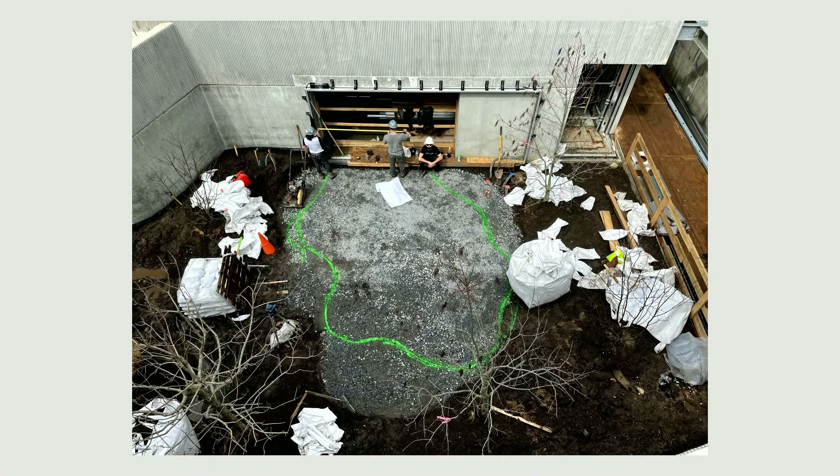One last area of particularity is the outside spot where the artist studio has their kitchen. They can come out and sit here in the landscape, in this figure where we brought waste and things we found from the site, almost a dystopian land, but we cast it in the concrete, so you see now these traces of the stuff that was on site into the ground patterns.